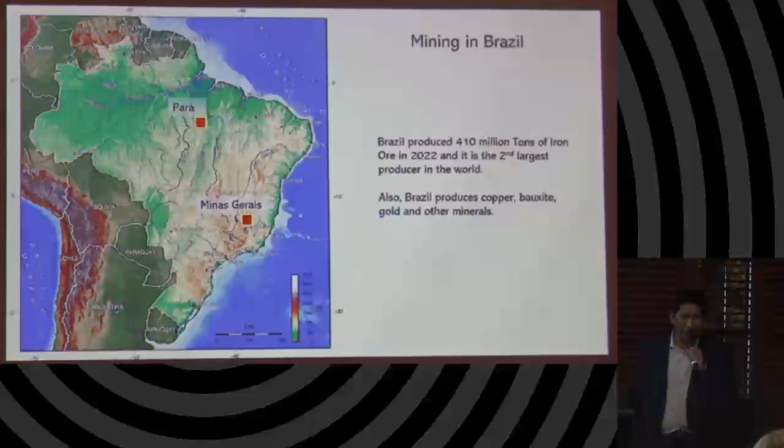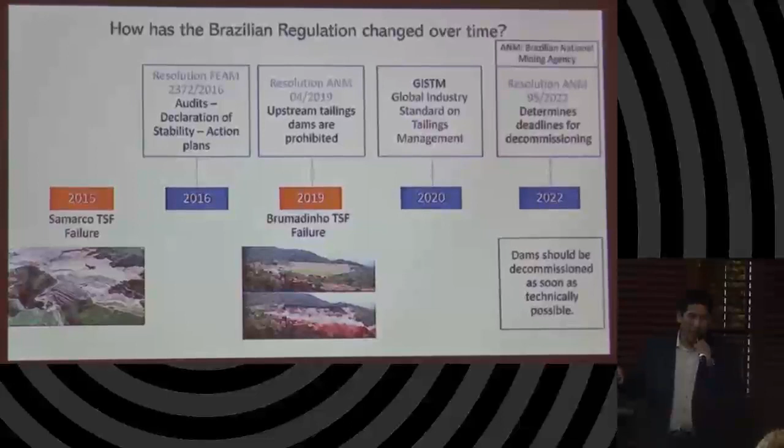How has Brazilian regulation changed over time? The Samarco TSF failure happened in 2015, and the regulator issued resolution FEAM, which established that operators should issue audits, declarations of stability, and action plans. The Brumadinho TSF failure happened in 2019, and as a response, the regulator issued a resolution which established that upstream tailings dams are prohibited. In 2020, the GISTM was issued, and finally, last year, the Brazilian National Mining Agency issued resolution ANM 95, which determines deadlines for decommissioning.

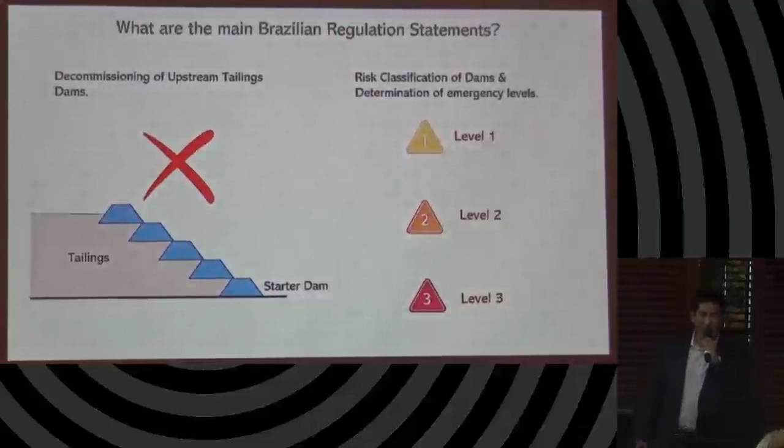What is the meaning of that? Dams should be decommissioned as soon as technically possible. What are the main Brazilian regulation statements? There are two, in my opinion: the decommissioning of upstream tailings dams, and the risk classification of them, with determination of emergency levels -- Level 1, Level 2, and Level 3.

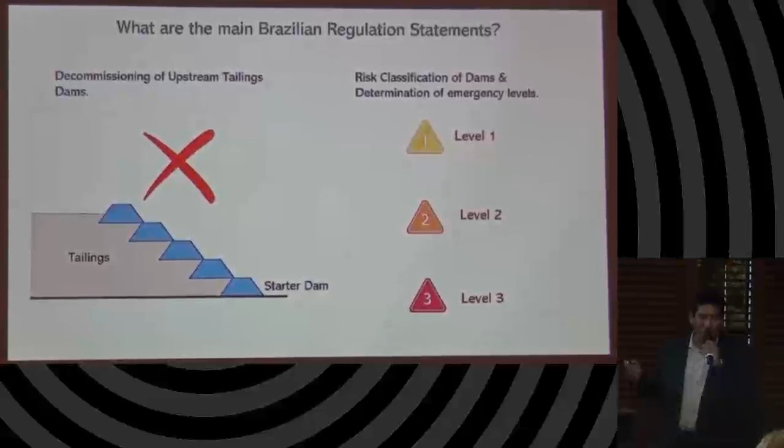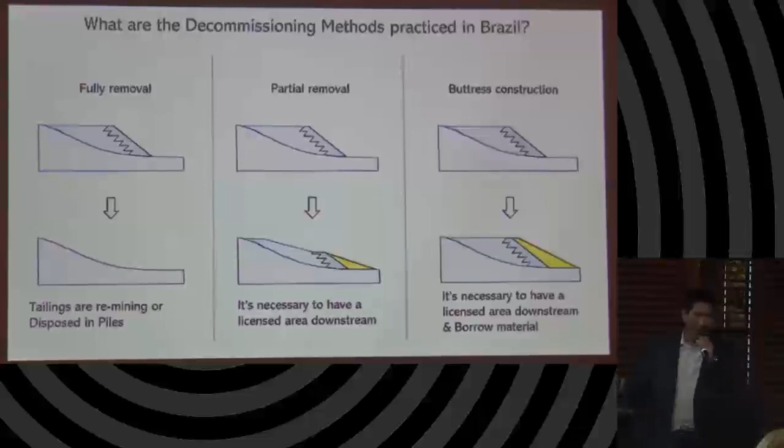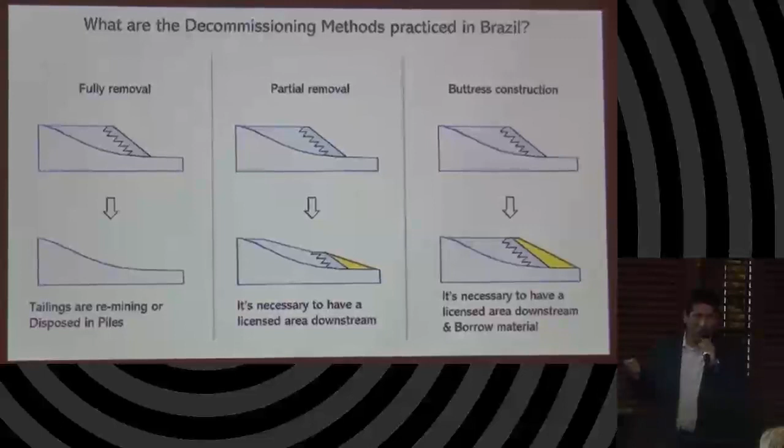What are the decommissioning methods practiced in Brazil? There are three methods. The first one is full removal, where the tailings are completely removed from the structure -- meaning removing millions of tons of iron ore tailings. There are two possibilities for these tailings: they could be re-mined, or be disposed of in piles. Obviously, this method is the most expensive. Can you imagine removing millions of tons of tailings?

Also, we need to have a license for remining, or a license for space to build a pile.

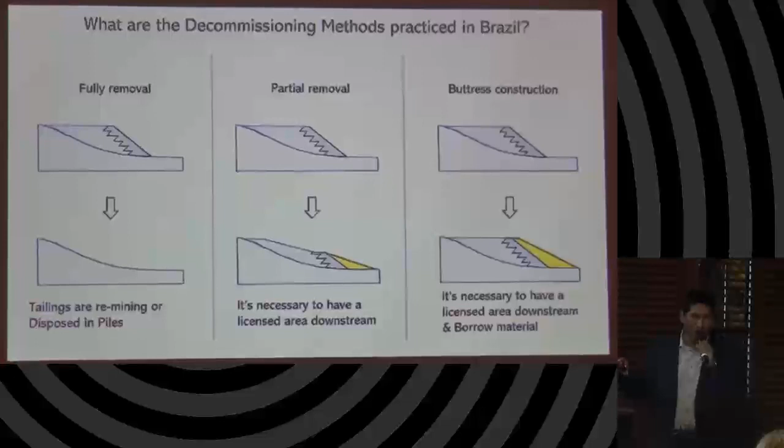The second method is partial removal. Maybe it's the most frequently used technique in Brazil, and it's necessary to have a licensed area downstream. This technique consists of removing the tailings upstream and placing them downstream.

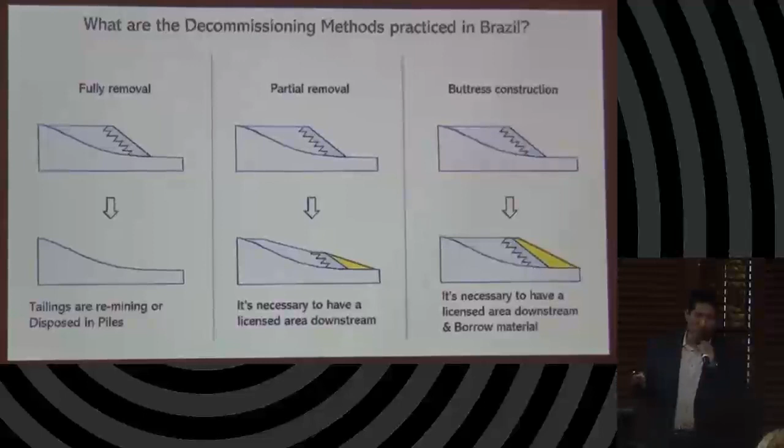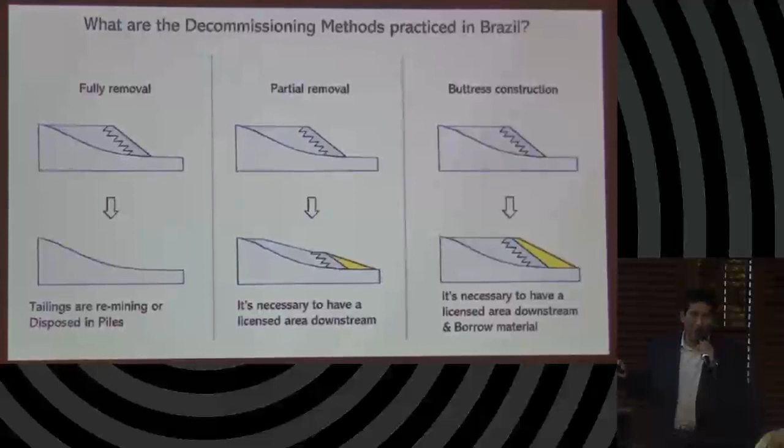The third method is buttress construction. When I talked to some colleagues from Australia, they told me, 'I can't imagine removing all the tailings -- why not construct a buttress?' Well, that's maybe the first option, but it's necessary to have a licensed area downstream and borrow material. Sometimes there is interference and it's not possible to build the buttress -- for example, a river, a facility, or simply not having a licensed area downstream.

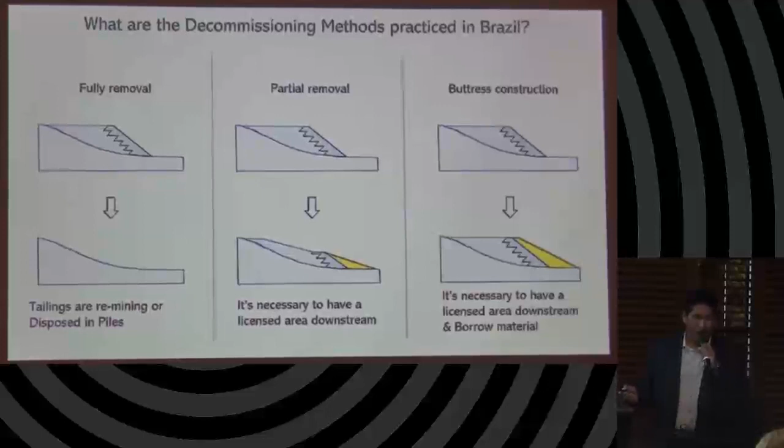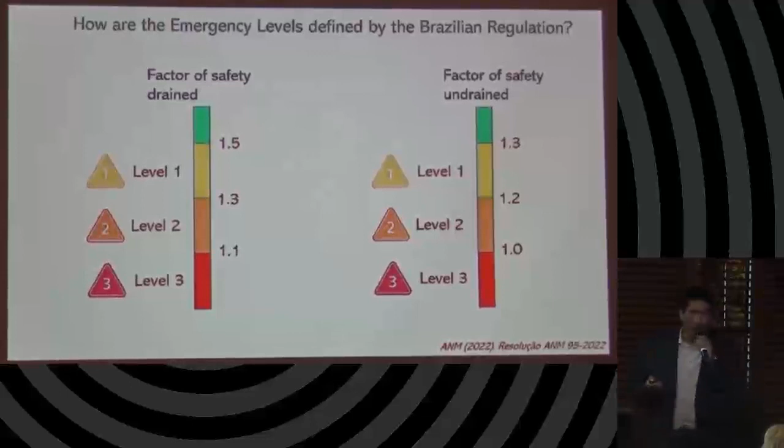If the factor of safety is between 1.1 and 1.3, the level is 2. And below a factor of safety of 1.1, the level is 3, which is a high-risk structure. Level 3 is dangerous, but there are some structures at that level.

So what is the impact of that? What impact is related to being in a determined emergency level? The regulation obligates operators to do something about that.

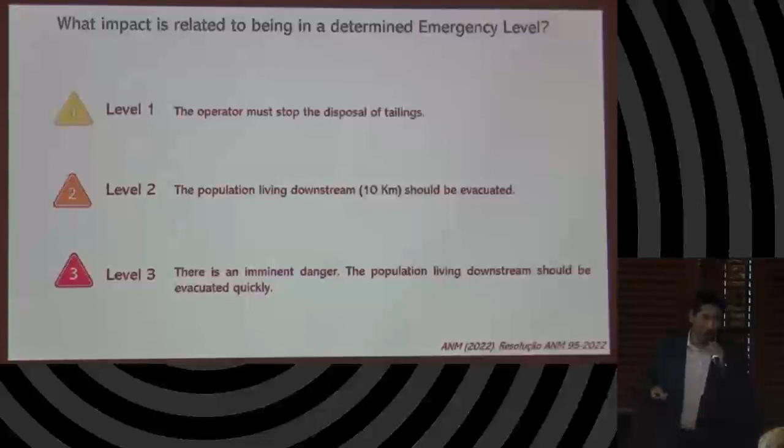If the structure is at level 1, the operator must stop the disposal of tailings and stop operations. If it is at level 2, the population within 10 kilometers should be evacuated. If the structure is a high-risk structure, it means there is an imminent danger.

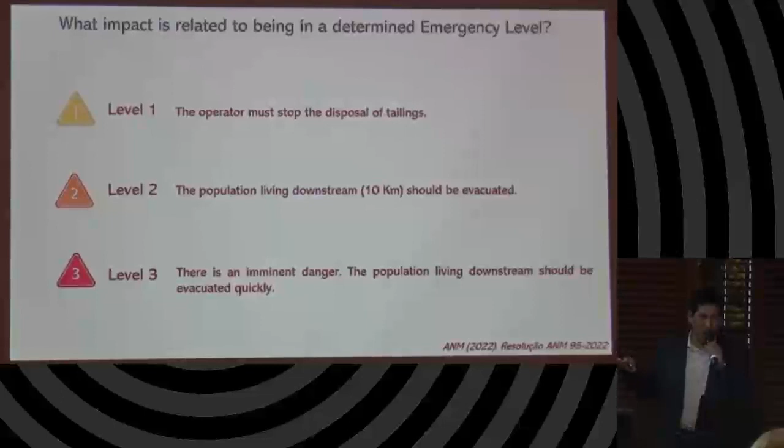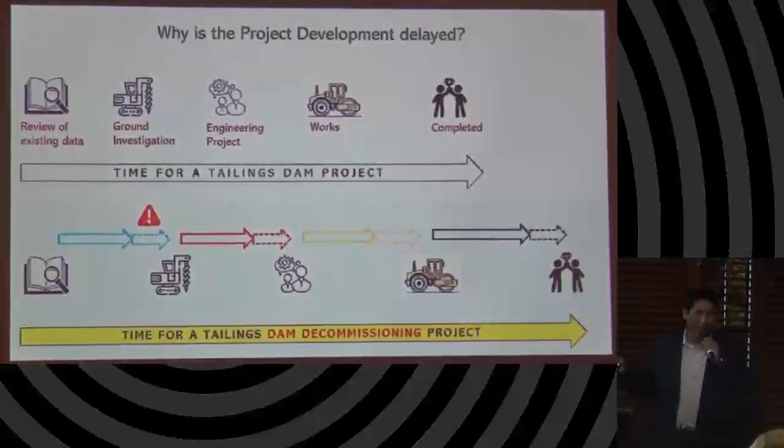But for that decommissioning project, these steps are more delayed. It takes much more time. There isn't enough data because the structures are old, and geotechnical investigation is hard to perform because there are restrictions for access. I will explain in the next slide why the project development is delayed.

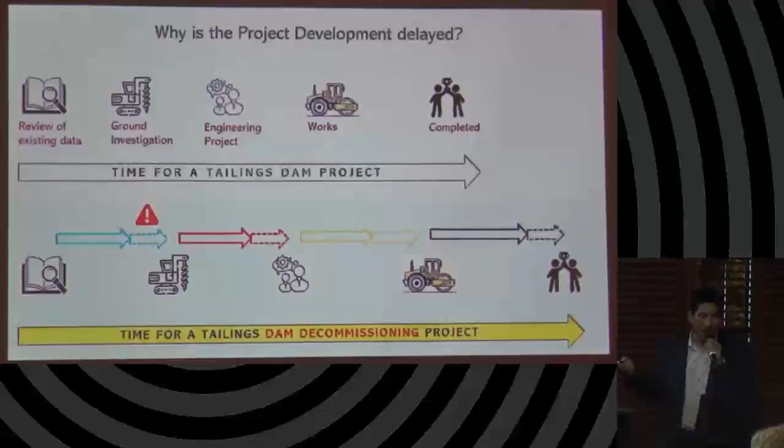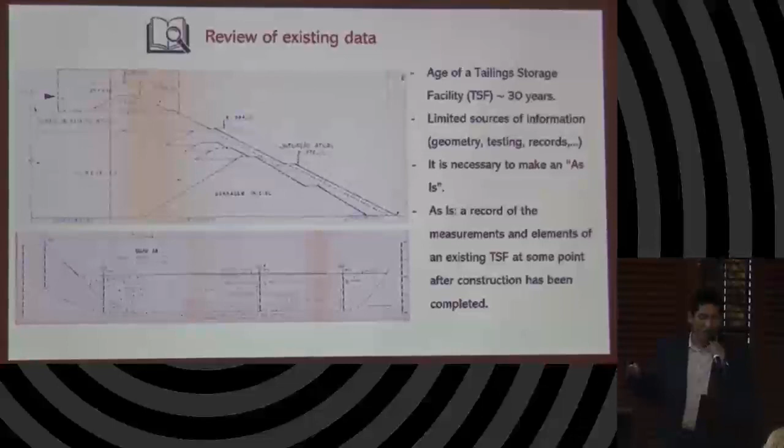We have some challenges. The first one is the review of existing data. The age of a tailings storage facility is on average 30 years, so there are limited sources of information like geometry and testing records. It's necessary to make an as-is assessment to perform geotechnical investigation. As-is is a record of measurements and elements of an existing TSF at some point after construction has been completed.

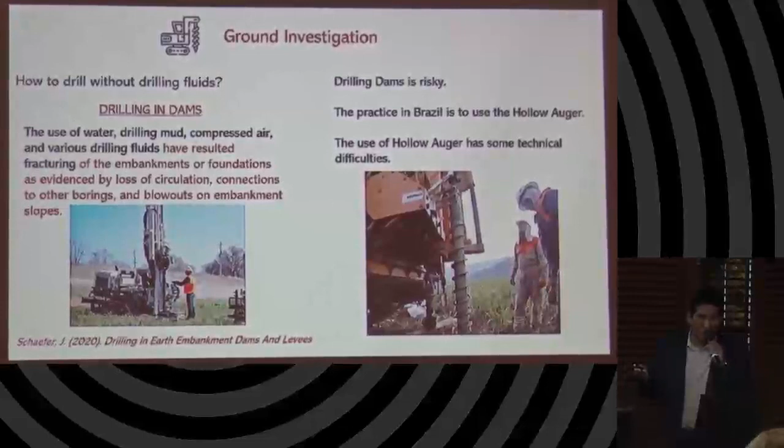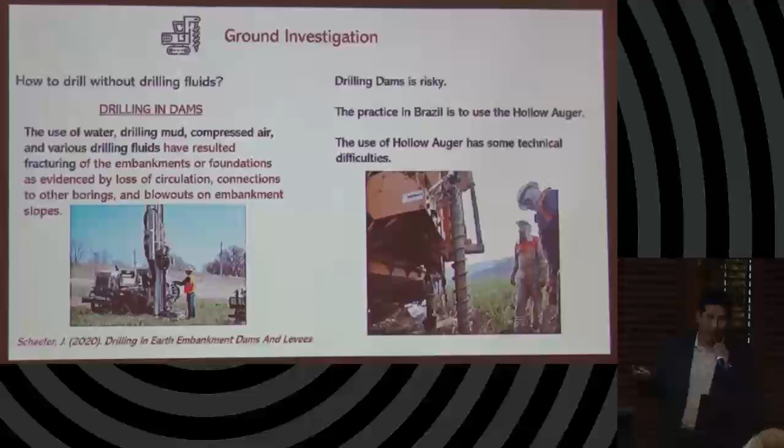About the ground investigation, how to drill without drilling fluids? Drilling in dams is a hard task. There is evidence of fracturing on embankments caused by using drilling fluids, so drilling in dams is risky. The practice in Brazil is to use the hollow auger, but this has some technical difficulties—it's not easy, and it's sometimes not possible to go beyond 15 meters in depth.

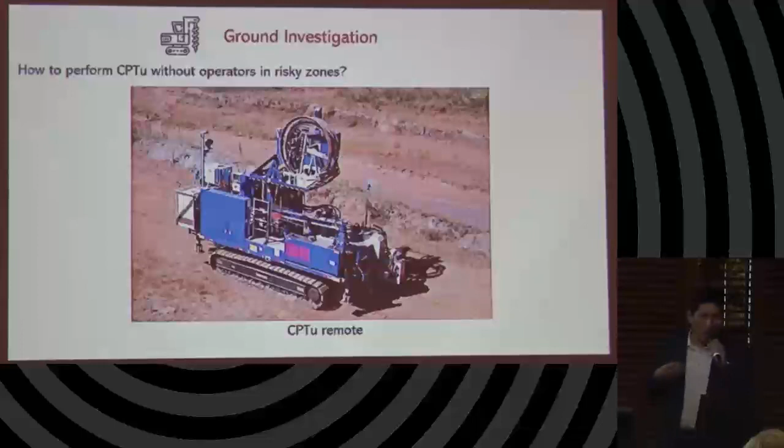Another challenge in ground investigation is how to perform CPT without operators in risky zones. If the structure is at emergency level above 2, regulation doesn't permit workers to stay in the field in that risky zone. So how can we investigate the ground? For that, a CPT remote is used—the equipment is operated remotely, the operator stays in a safe zone while the equipment is in the risky zone. This way, it's possible to investigate that zone.

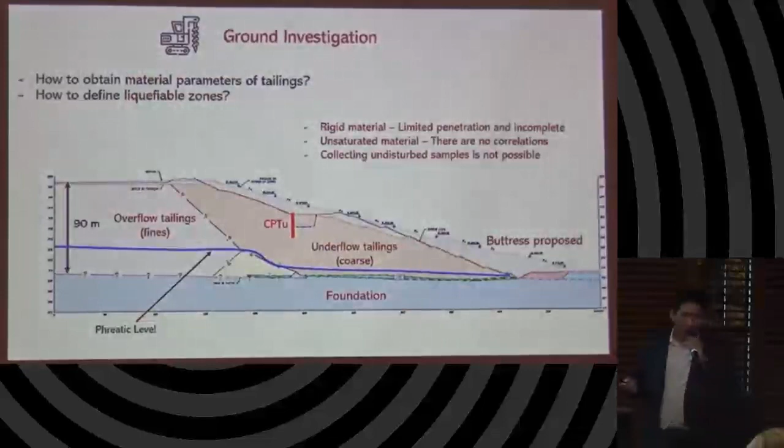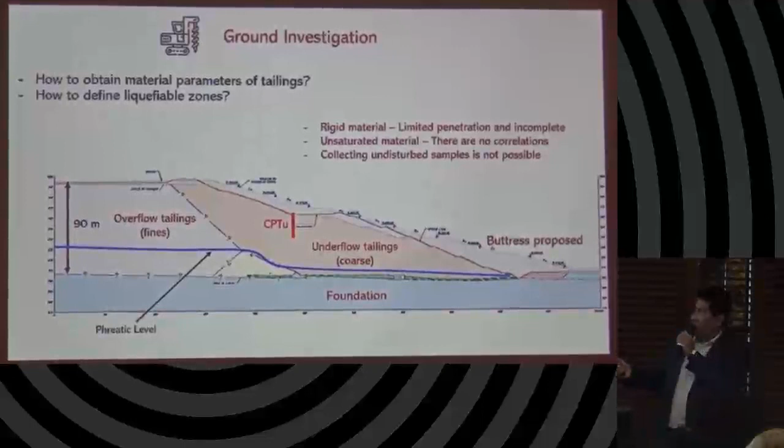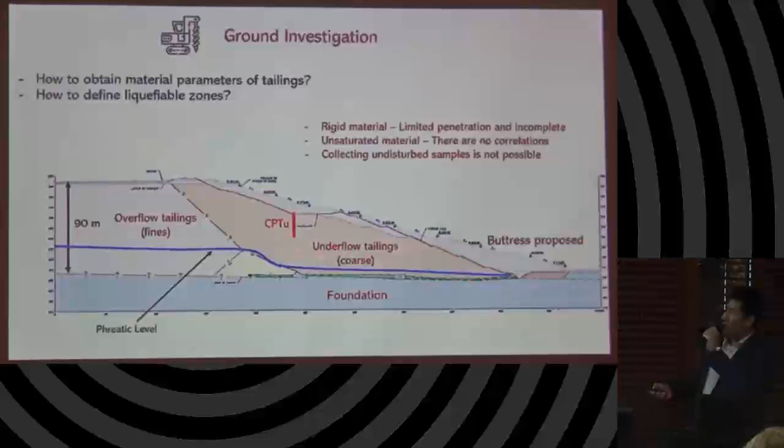Another challenge is how to obtain material parameters of tailings and define liquefiable zones. We can see in this example section a zone consisting of underflow tailings, which is coarse and unsaturated material. The blue line is the water table level, and the thickness is around 50 to 60 meters. How can we perform CPT here?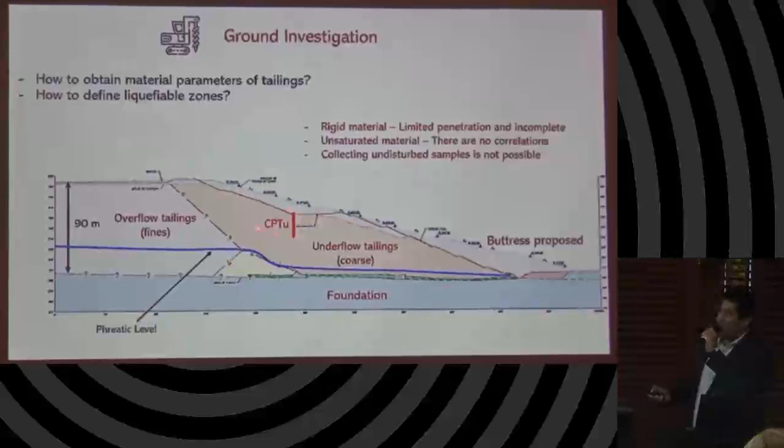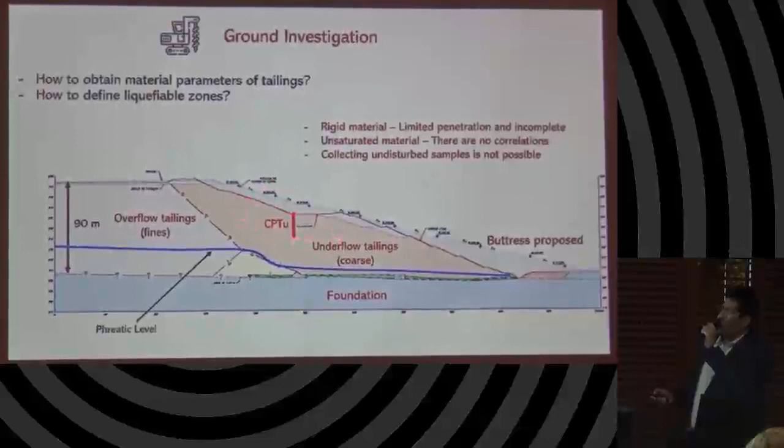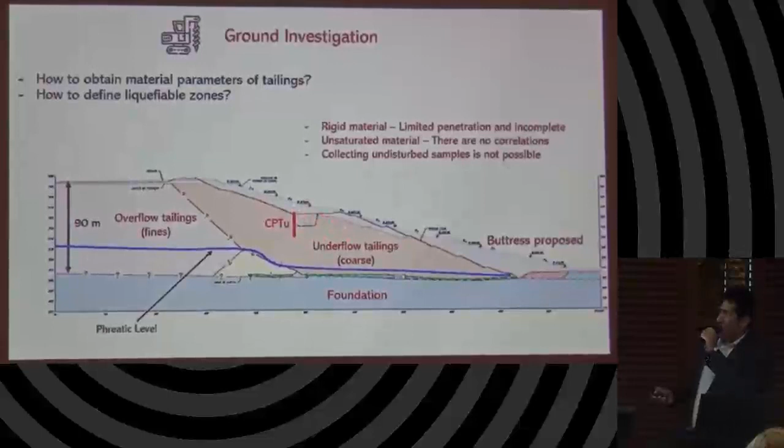The CPT can penetrate just 5 or 10 meters, but we need more. Again, the correlations for tailings are for saturated materials—there are no correlations for unsaturated materials, so this information isn't convenient. We need to penetrate more than that. To solve that, the CPT is performed together with drilling equipment in order to reach more depth and reach the saturated region.

How to perform geotechnical monitoring without workers in risky zones? In these structures, we need to continue monitoring, reading piezometers and instruments, but workers cannot stay in risky zones. So for that, workers enter the risky zone tied to a lifeline.

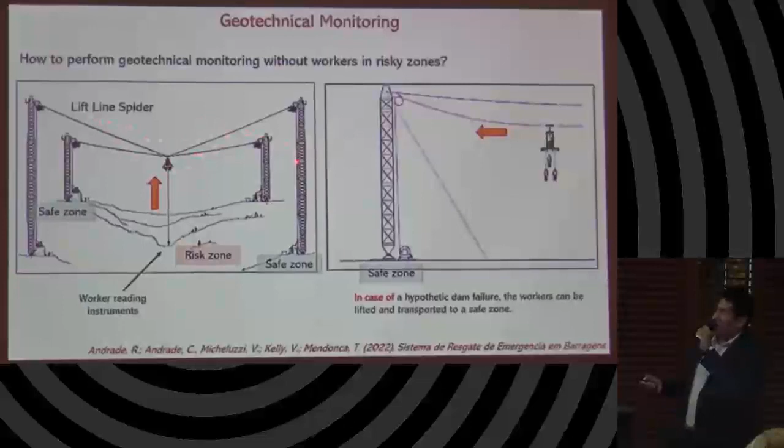This system is named Lift Line Spider. In case of a hypothetical failure, the workers can be lifted and transported to a safe zone, just in case. Here's a picture of the system—it's currently operating.

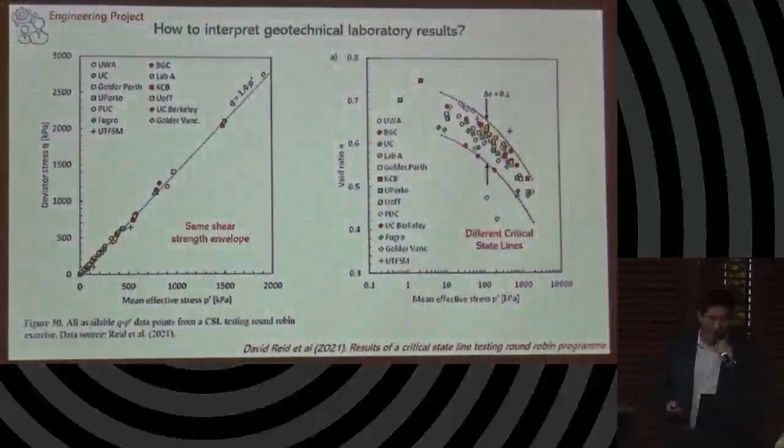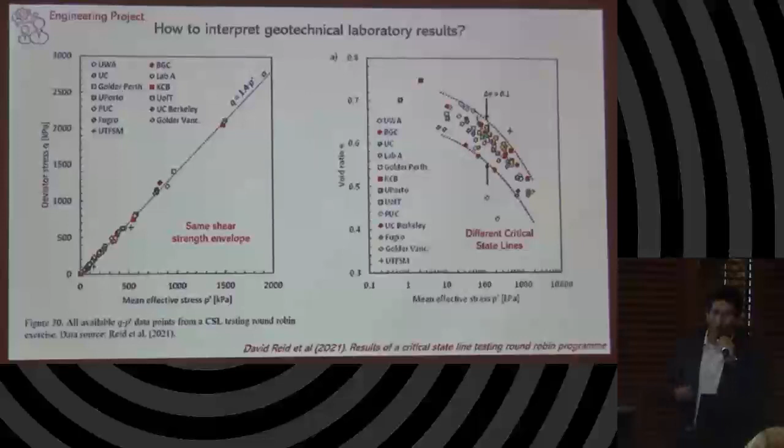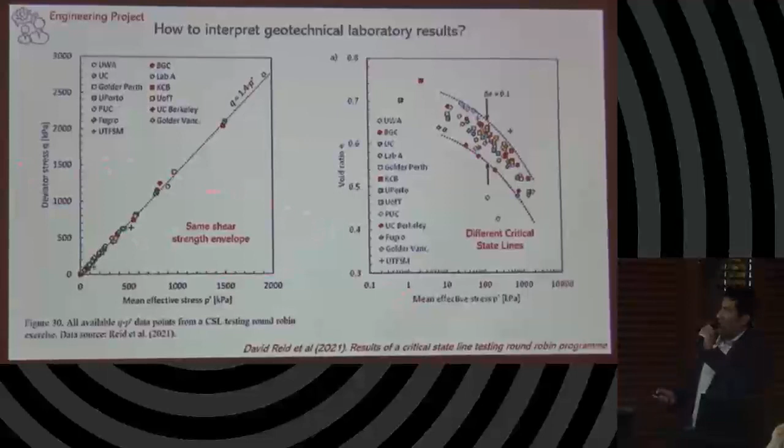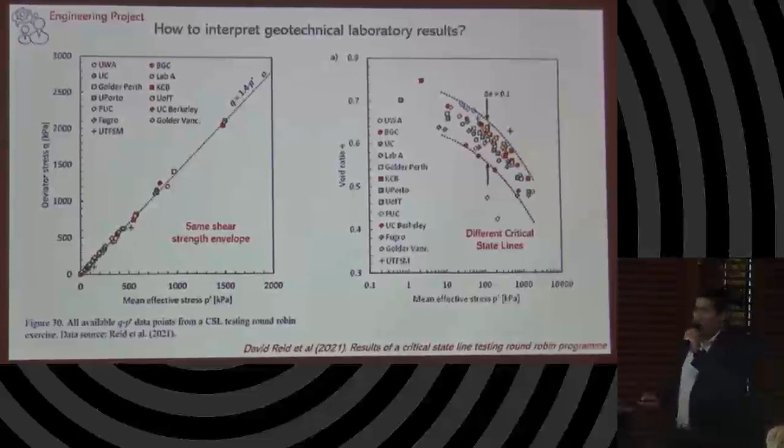How to interpret geotechnical laboratory results? For these structures, can you imagine how many structures need to be decommissioned? We need to perform so much laboratory testing. According to this research on the definition of the shear strength envelope, there isn't much difference between different laboratories. In this research, a round-robin program was performed—the same sample of tailings was sent to laboratories around the world, and they performed laboratory testing independently.

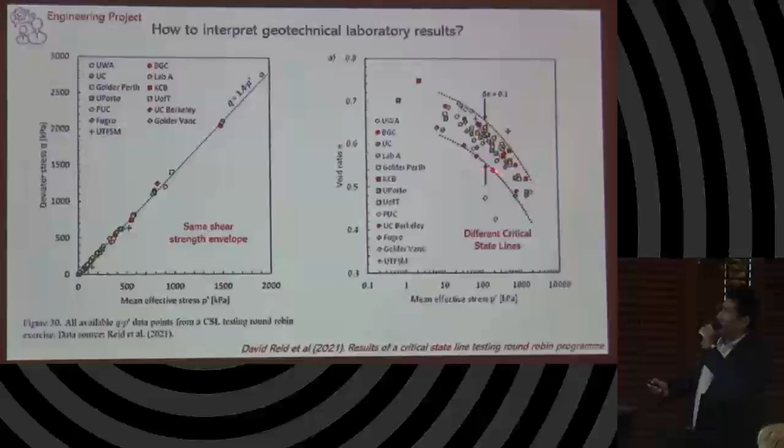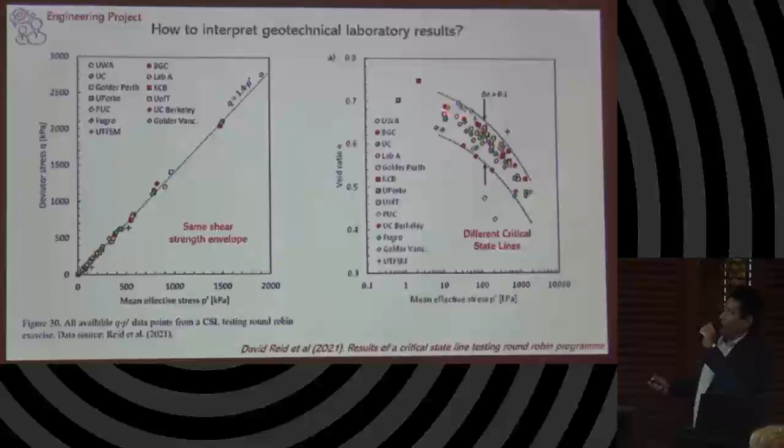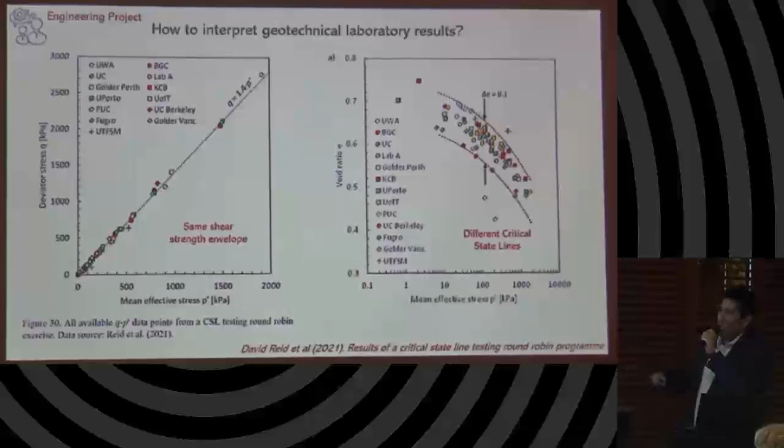The results show the same shear envelope, which is good. But for the critical state line, they show different critical state lines. This information is sensitive to sample preparation and laboratory procedures, so we need to take care and be aware of the limitations of testing when we make numerical models, perform slope stability analysis, or calculate the potential of liquefaction.

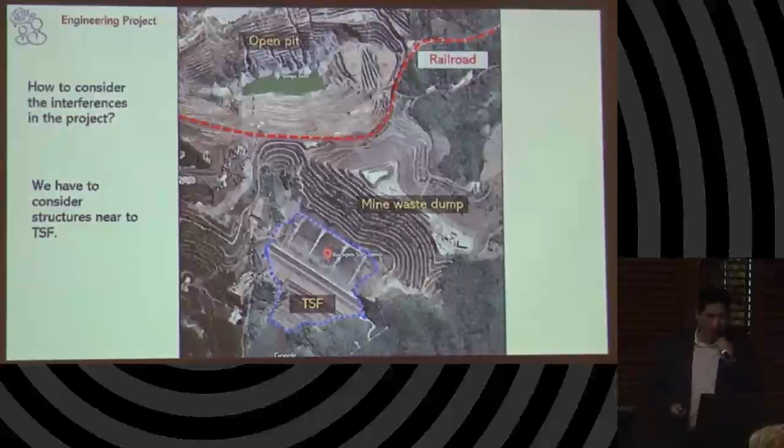Another challenge is how to consider interference in the project. In this picture, we can see the TSF, the Tailings Storage Facility, close to a mine waste dump, close to an open pit, and a railroad. The railroad is operating, so the mine depends on the operation of the railroad—we cannot stop the operation.

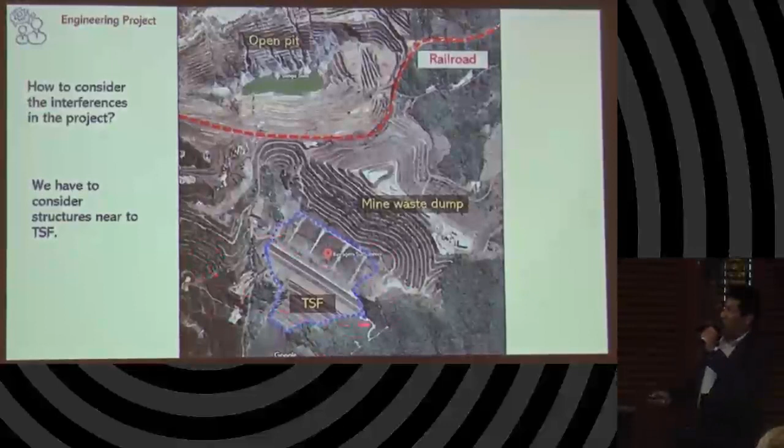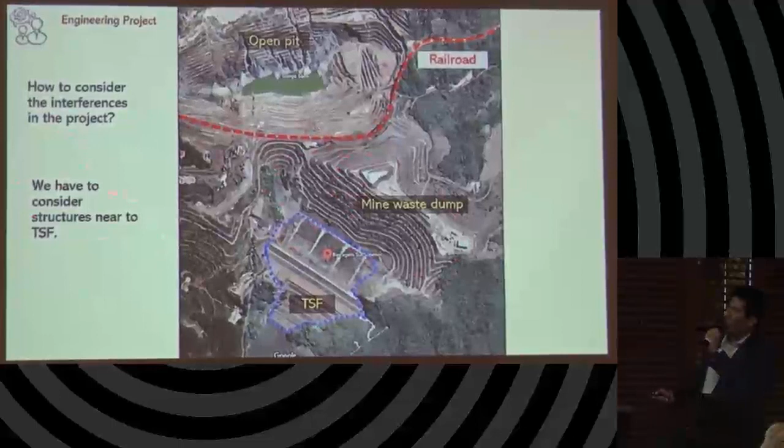But to eliminate this structure can cause some disturbances to other structures, so we have to consider structures near the TSF.

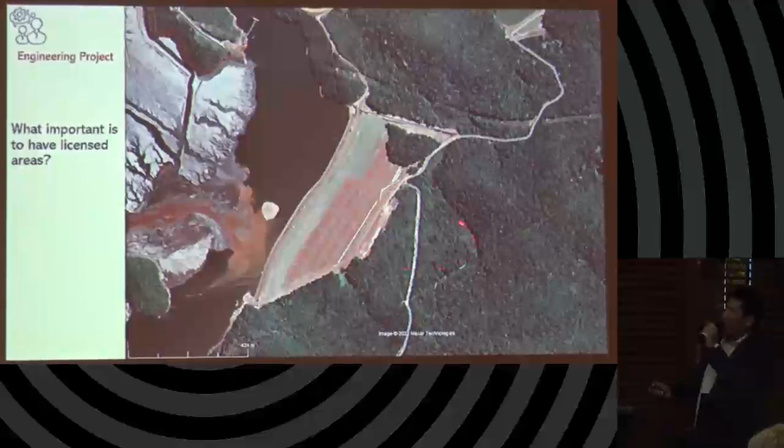What's important is to have licensed areas. In this example, we can see the rainforest close to the dam, and we don't have a license to do works here. It's so difficult—this process could take some years. It's sometimes not possible to get a license; we may even receive a negative response.

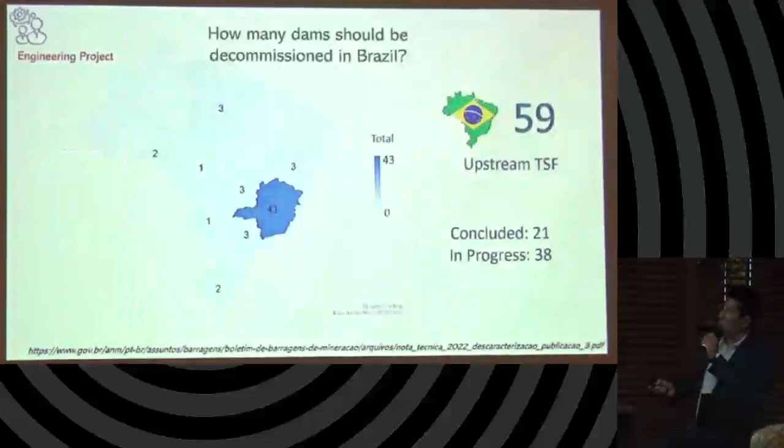How many dams should be decommissioned in Brazil? Currently, the information is there were 59. It's a lot. 21 dams were decommissioned and 38 are in progress. Can you imagine if anytime, anywhere, 59 dams were decommissioned at the same time? It's a big impact of the regulation, but it's happening in Brazil now.

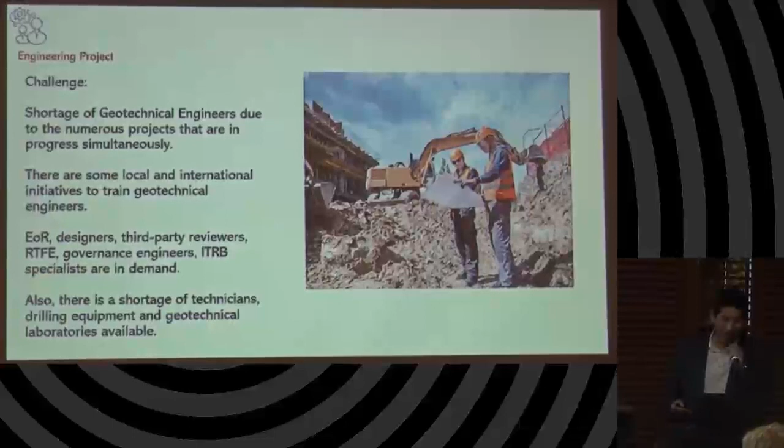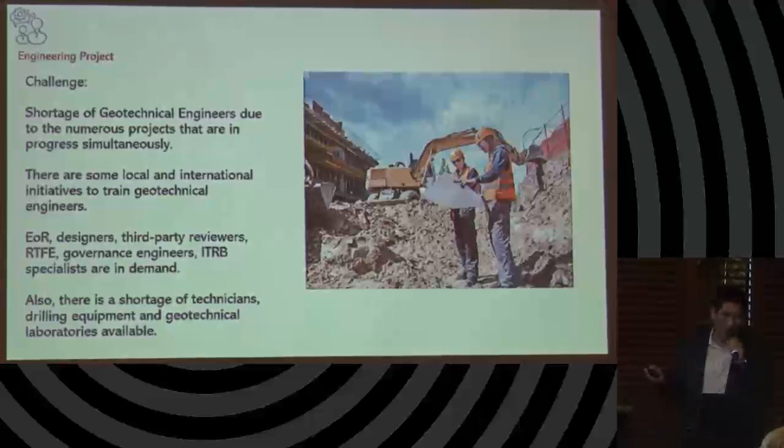And so for this reason, there is a shortage of geotechnical engineers due to the numerous projects in progress simultaneously. There are some local and international initiatives to train geotechnical engineers. EOR designers, third-party reviewers, RTFE, governance engineers, ITRB specialists are in high demand in Brazil. Also, there is a shortage of technicians, drilling equipment, and geotechnical laboratories available. If I want to send a soil sample to a laboratory, I need to wait 4 to 6 months. So the projects are in demand at this moment.

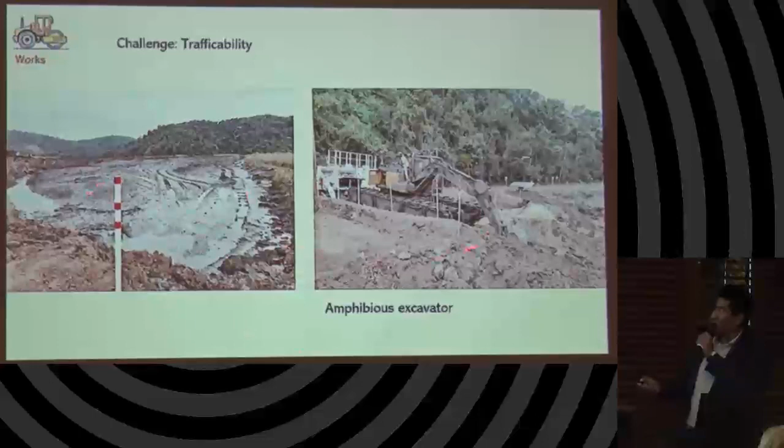In the field, we have some challenges as well. For example, the trafficability. When you work on the tailings, you can walk because it's dry. But if you excavate 2 meters, you can find saturated material with high moisture. And the vehicles cannot traffic on there, so it's necessary to use an amphibious excavator.

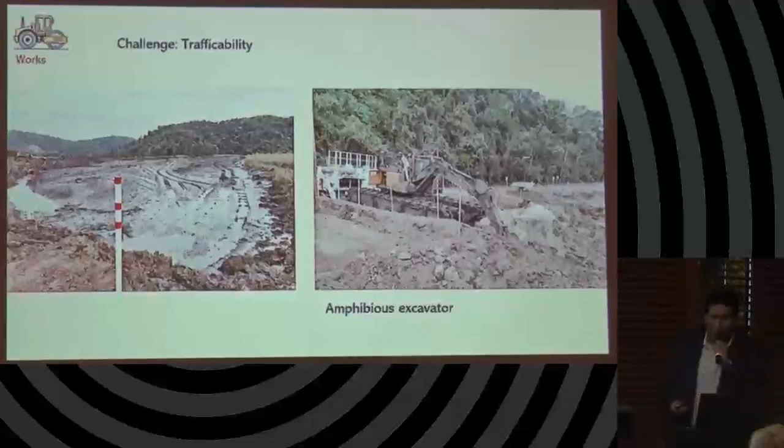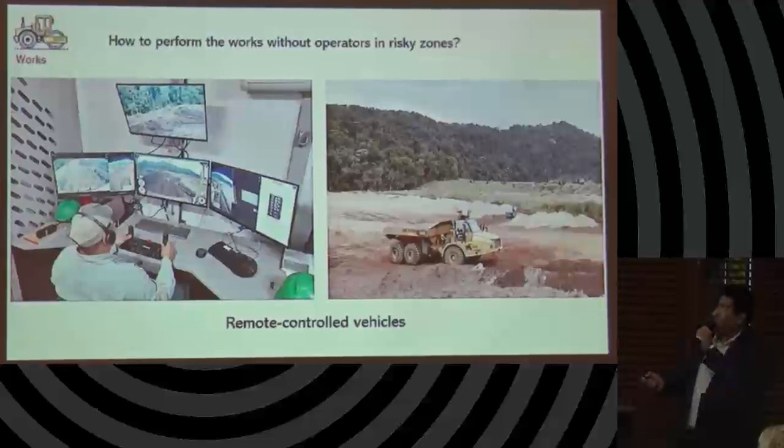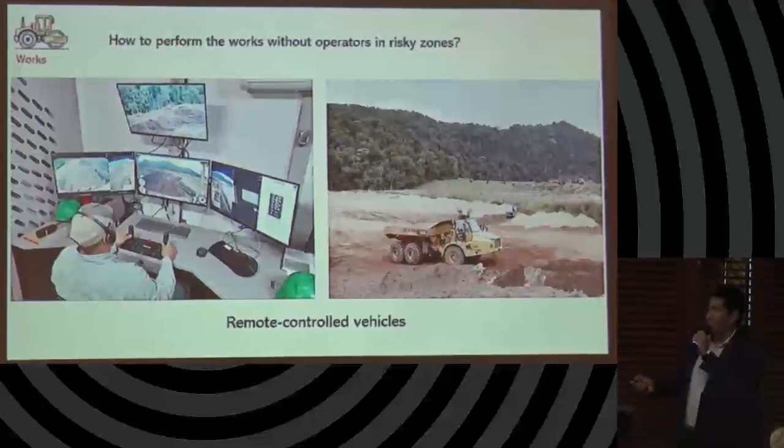Another challenge is how to perform the works without operators in risky zones. For that, remote control vehicles are used, so the operators are in a safe zone and the vehicles are in the risky zone. Logically, it's more expensive to use these types of vehicles, so the budget is higher than if conventional ones were used.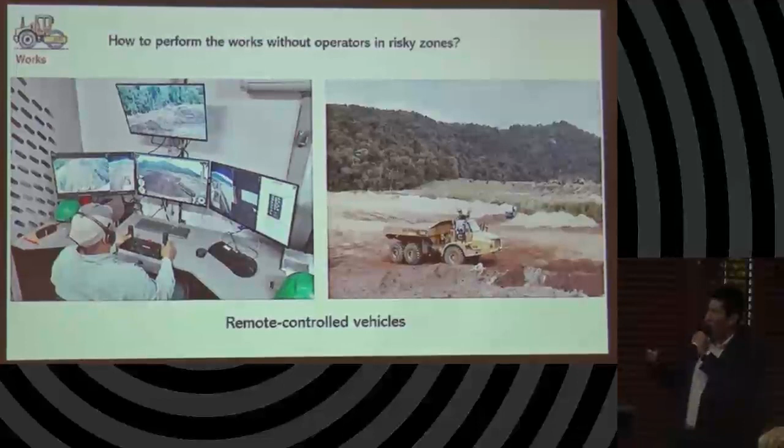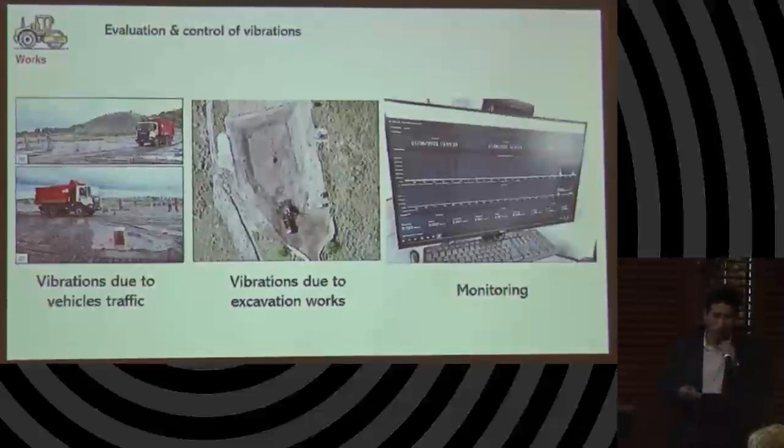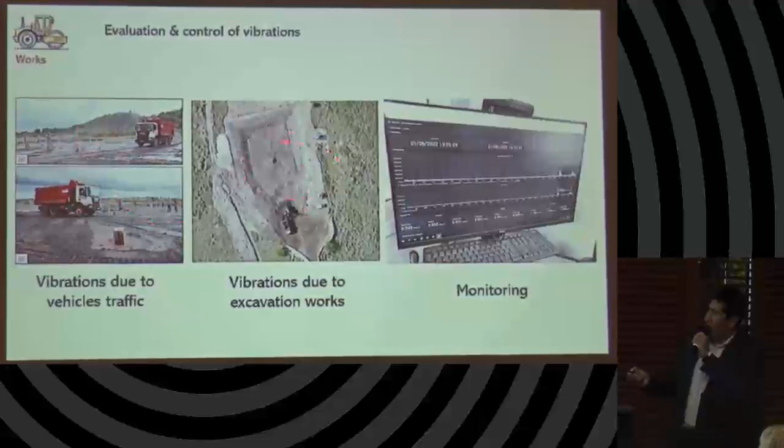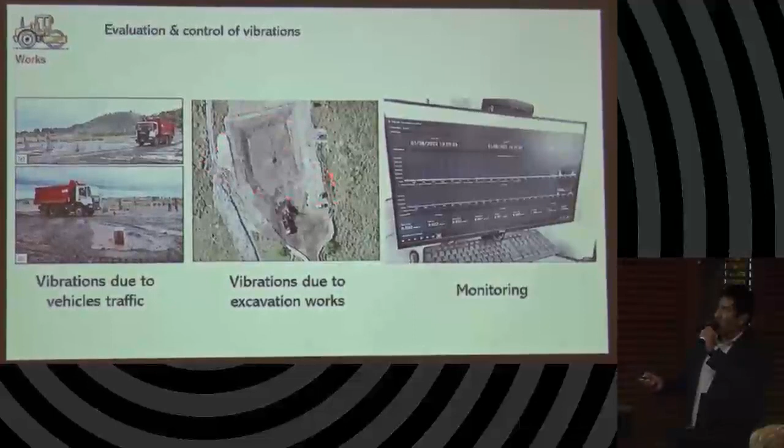Another issue is the evaluation of uncontrolled vibration. As we know, some structures have marginal stability, and we don't know if the works could start a trigger. To limit vibration triggers, some testing has been performed before the works in order to define thresholds for vibration. For example, in this figure, we can see the geophone and the vehicles. And in this figure, you can see the trial when simulating excavation, while monitoring the piezometers and geophones. And during the works, there is monitoring of vibration.

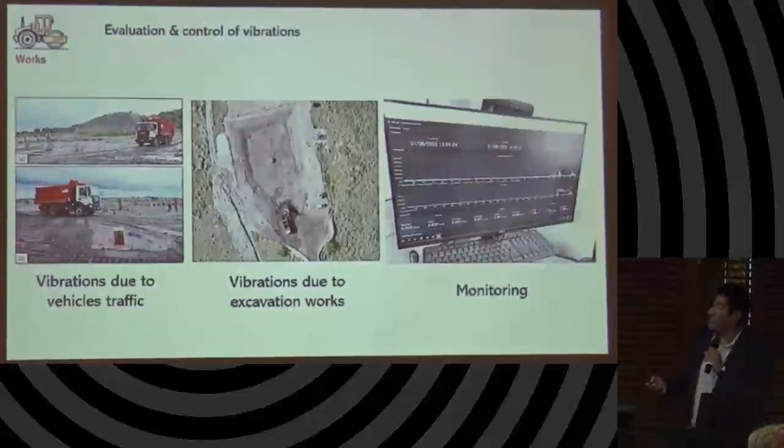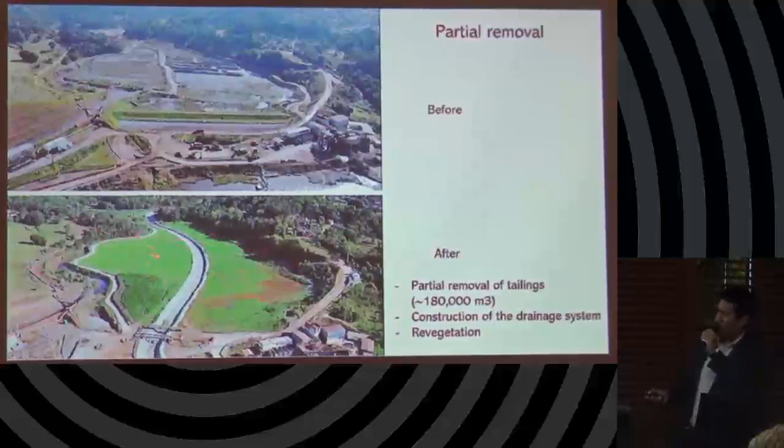In the case of partial removal, you can see the upper figure before the works, and after the partial removal of tailings, construction of the drainage system and revegetation. You can see here, it looks like there was not a tailings dam here, so fortunately it was a successful project. In this case, it is the construction of rock-fill buttresses, 14,000 cubic meters, before and after, and construction of the drainage system.

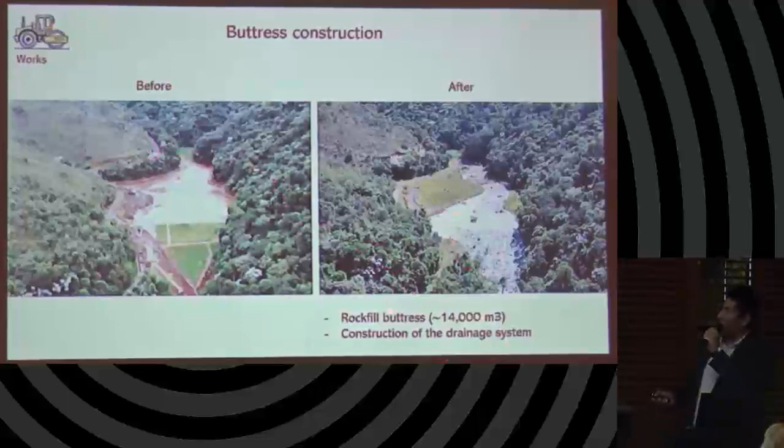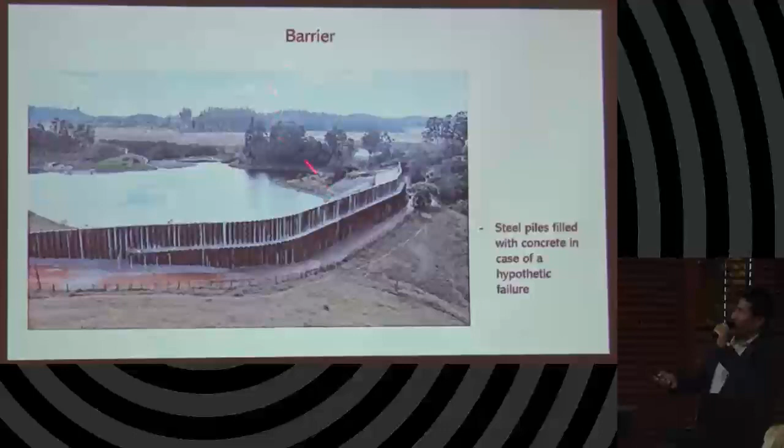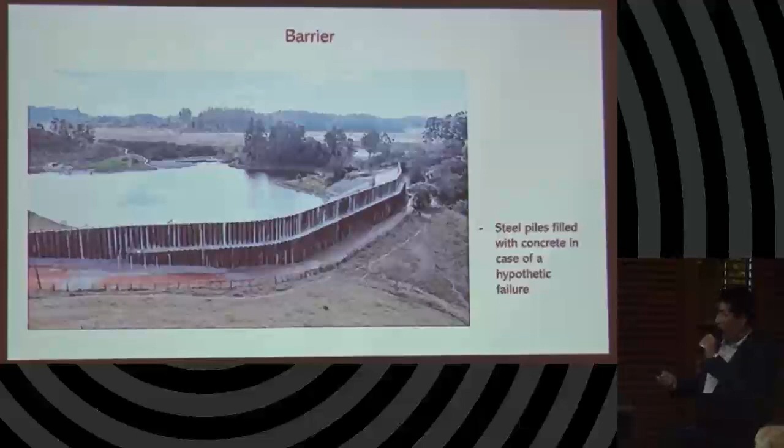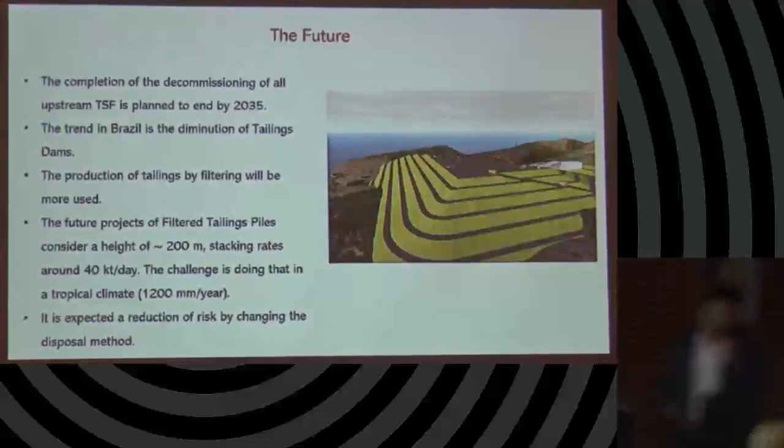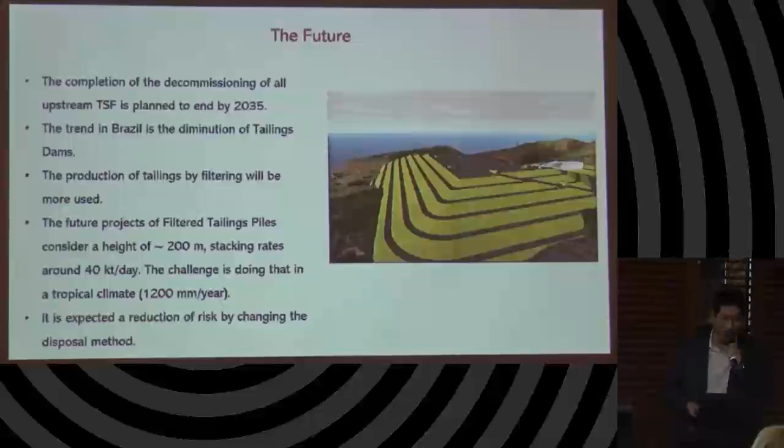The challenge is doing that in a tropical climate. Maybe it's easier to do that in Chile or Peru, where the climate is dry, but in Brazil there are some difficulties, especially in the rainy season. A reduction of risk is expected by changing the disposal method.

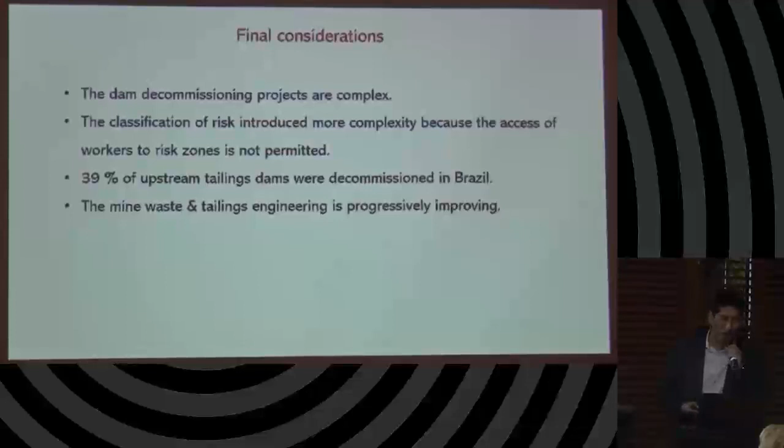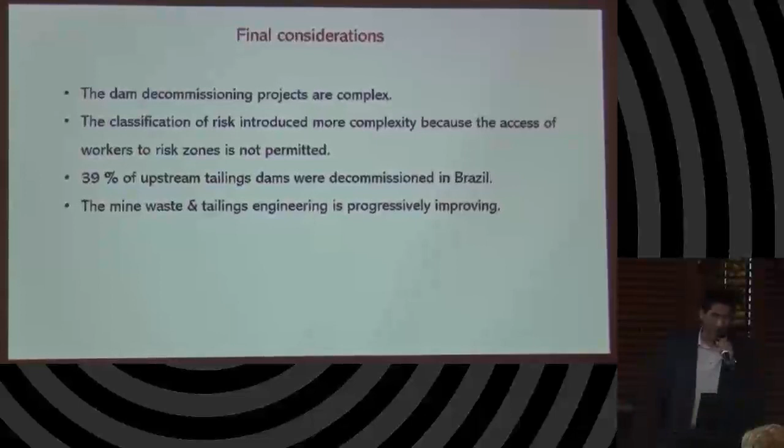Finally, dam decommissioning projects are complex. The classification of risks introduces more complexity because the access of workers to risk zones is not permitted. It's difficult to perform geotechnical investigation, monitoring, and so on. 39% of upstream tailings dams were decommissioned already in Brazil. Mine waste and tailings engineering is progressively improving.

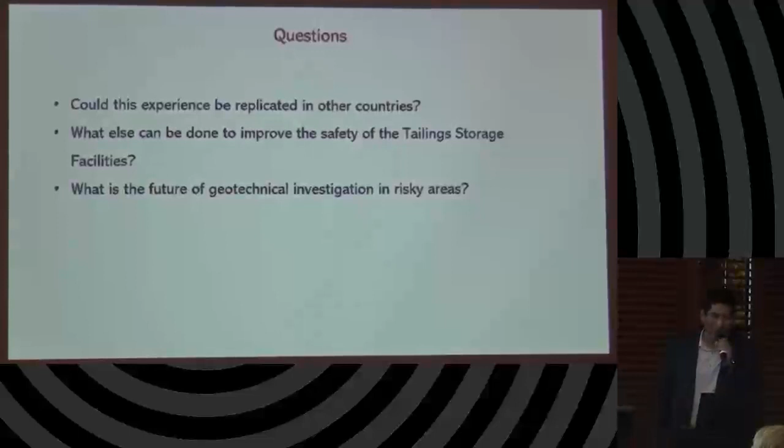Some questions: could this experience be replicated in other countries? What else can be done to improve the safety of these tailings storage facilities? What is the future of geotechnical investigation in risky areas? Some questions to Tim.